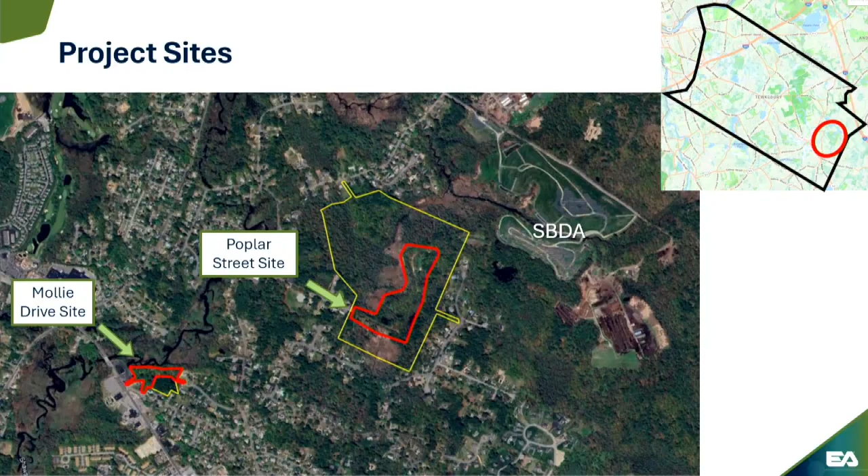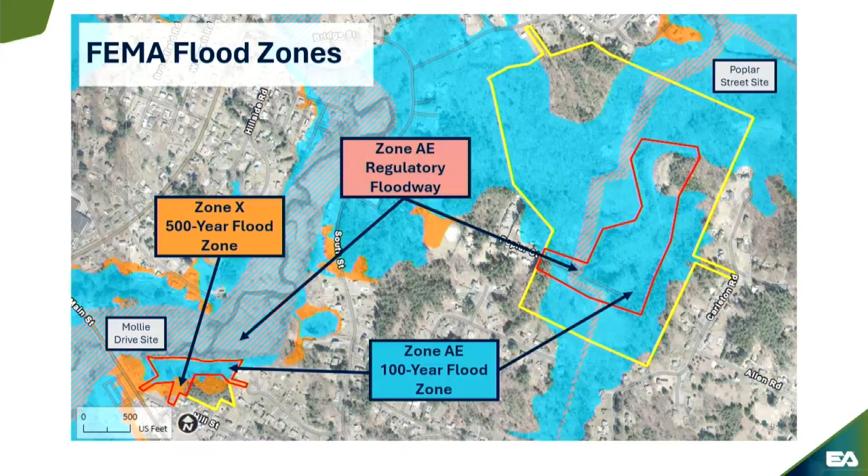This map just shows the location of the two project sites within the town. I just want to point out that the majority of both sites are located within the FEMA 100-year flood zone. So a key goal of the project, which you'll see in the following several slides, is the removal of historical fill from the flood zone to help restore flood storage capacity, as well as restore historical wetlands that have been filled.

Starting with the Mollie Drive site, the overall work area is about 1 acre in size. The site was formerly used as a contractor yard and was acquired by the town.

There was a small soil remediation completed a few years ago, but you can see the areas outlined in orange are the approximate location of soil berms that had been developed prior to the town's ownership of the site, basically soil being pushed around and dumped on site, some of which was placed within wetlands along the Shawsheen River.

The rest was placed within the 100-year floodplain of the river. So the overall goal of the work at this site is to remove those soil berms and restore historic wetlands and floodplains. There's also a good amount of scattered debris across the site, which we are proposing to remove to improve habitat, safety, and aesthetics.

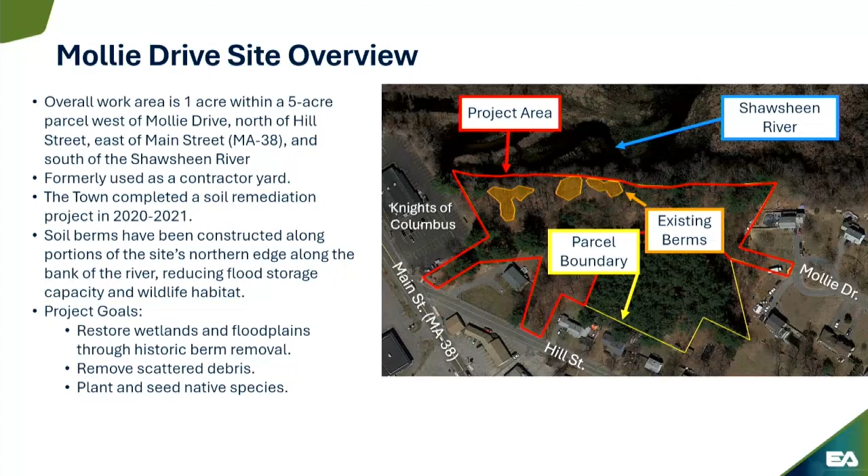The work area at Mollie Drive is relatively small. We have two areas of proposed berm removal, which you'll see a little easier on the next slide, and two areas of proposed grading. One is right along the bank of the river, and the other is just slightly to the left and below that.

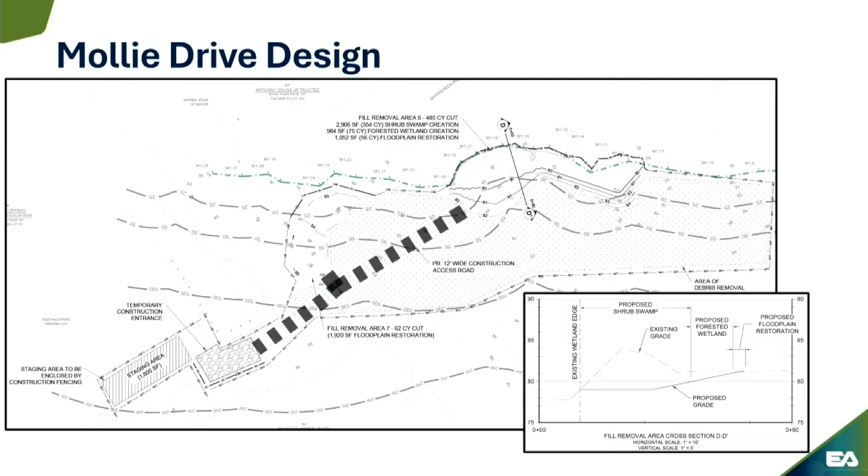The rest of the project is basically the stippled area, which is really just going in and doing selective removal of debris that's visible on the ground surface. So at the Mollie Drive site, we're proposing about 550 cubic yards of fill removal.

The areas and depths of the fill removal are largely based on an evaluation of topography. In a lot of cases, the berms are pretty obvious. There's also been a previous effort to do soil borings at the site, which helped understand the depth of fill that would need to be removed to get back to the native wetland soils.

So about 7,200 square feet, or about 0.2 acres of work to remove fill within this site. That will result in about 2,900 square feet of shrub swamp restoration, just under 1,000 square feet of forested wetland restored, and almost 3,000 square feet of upland forest and floodplain restoration.

There's about 330 square feet of excavation within the BVW just along the edge. That's mainly to get the grades to tie in, so that area will remain wetland. There will just be a few inches of grading along that edge to get the grades to tie in.

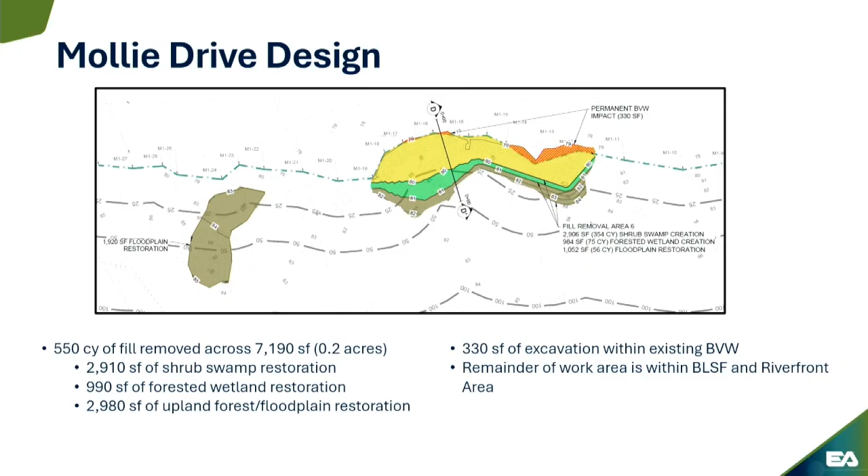Moving to the Poplar Street site, the work area is about 3.1 acres. This is the former site of the Tewksbury South Street well fields. There's been extensive historical alterations to this site.

There are a number of isolated wetlands along the east side of the existing path that have been severed from the larger wetland system that flows through the site due to historic filling. There's also a number of linear berms right along the edges of wetlands that have been placed within historic wetland areas. Similar to the Mollie Drive site, the overall goal here is to remove historic fill, improve flood storage capacity, restore wetland acreage, improve wildlife habitat, and the other functions and benefits that go along with that.

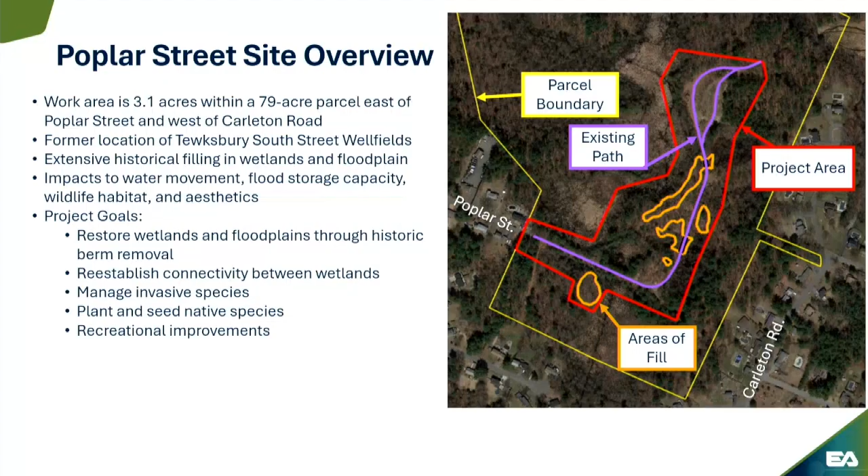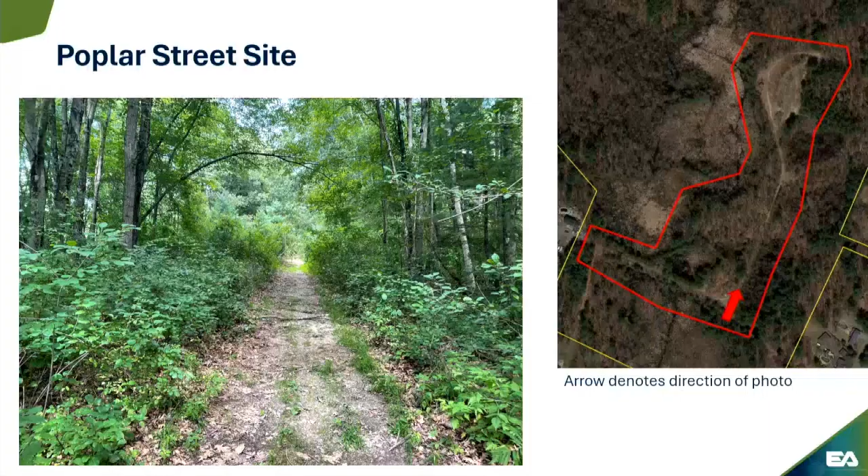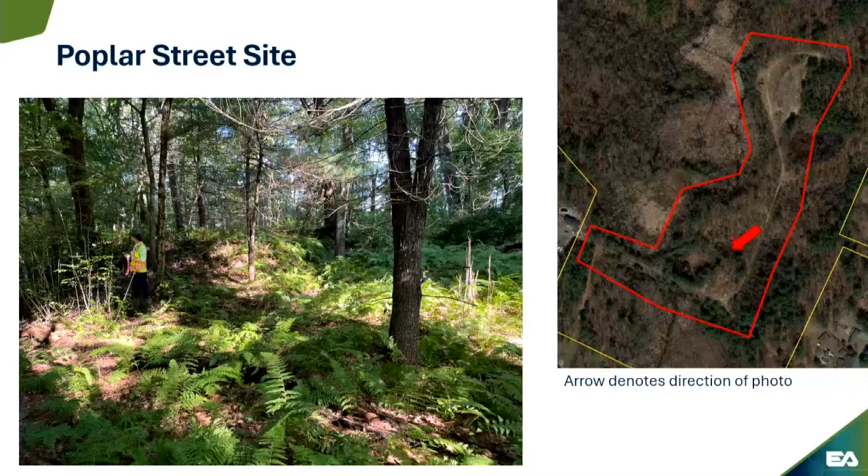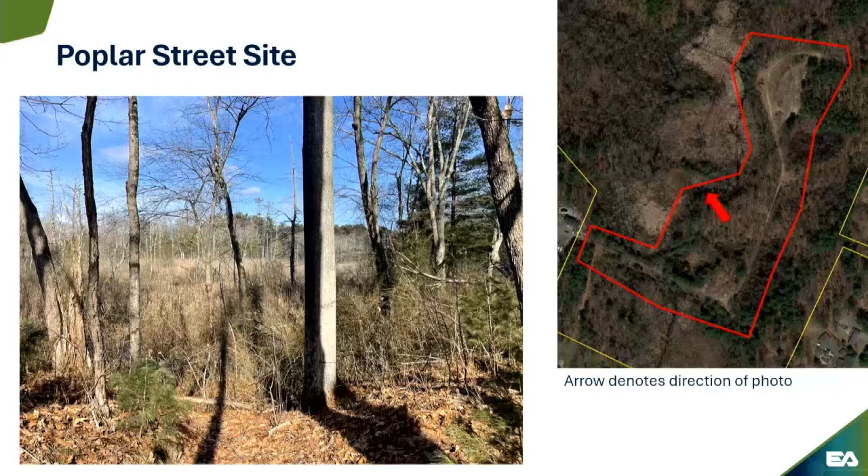So this is the large wetland system to the northwest of where all the work is proposed. That's where the isolated wetlands would have been connected in the past, and we're hoping to help reestablish those connections through the fill removal.

There's also some limited recreational improvements, primarily in the northern end of the site. There's currently a very steep eroding slope in the northern part of the site that we're proposing to install a series of steps to make that access a little more stabilized. We're also proposing a few benches up in that area.

But the main portion of the work is primarily the fill removal, and you're seeing the northern edge of that on the sheet. In that cross-section view, you can really clearly see the soil berm. On the left-hand side is the existing wetland elevation, right around 80.

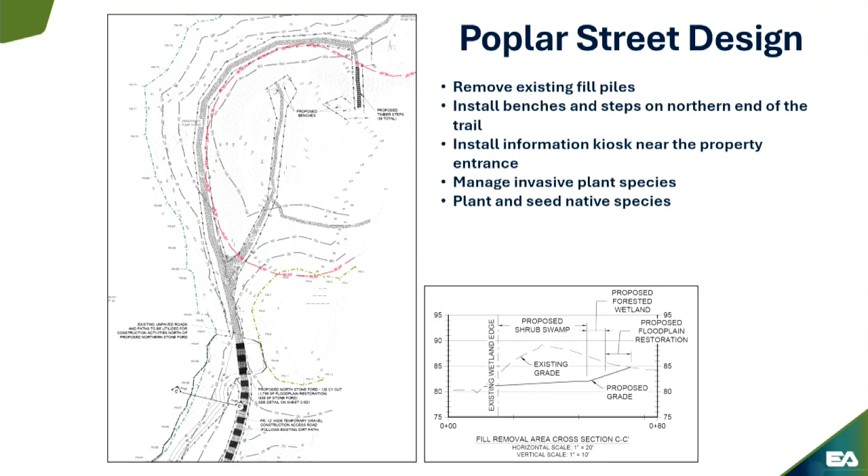On the right-hand side is the native ground surface, and then it goes all the way up to like 88, 89 feet at the top of that berm. So we'd be removing that and improving hydrologic connectivity and restoring wetlands that have been filled.

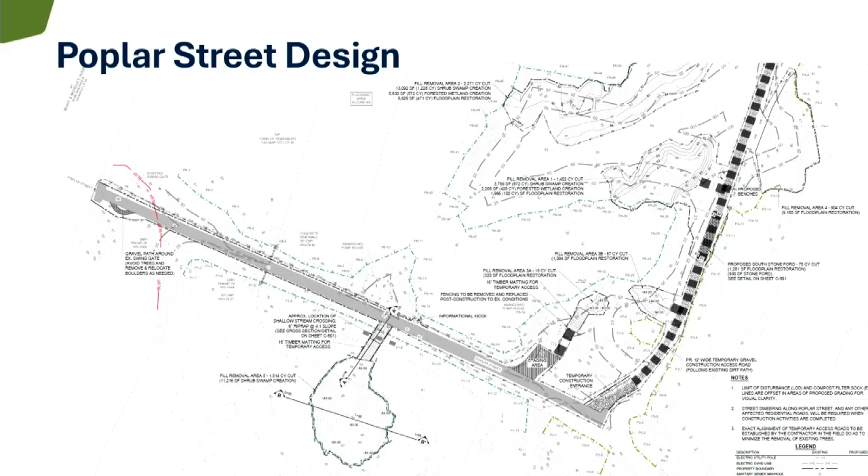So this is the southern part of the site. You can see more of the proposed grading here. The access is primarily along the existing roadway. There's going to be some short access spurs that go off through the forested areas to get to some of these berms, but we're trying to target those to avoid any unnecessary tree removal.

And this is the whole grading approach for the entirety of the Poplar Street site. You're seeing all the different areas of berms proposed to be removed, a total of about 6,176 cubic yards of fill removed across 1.3 acres, which would restore about 0.6 acres of shrub wetland, about 0.2 acres of forested wetland, and 0.5 acres of floodplain restoration.

We do have some excavation within the BVW right along those edges, but those areas will continue to be wetlands. There'll just be a small amount of excavation right along that proposed edge.

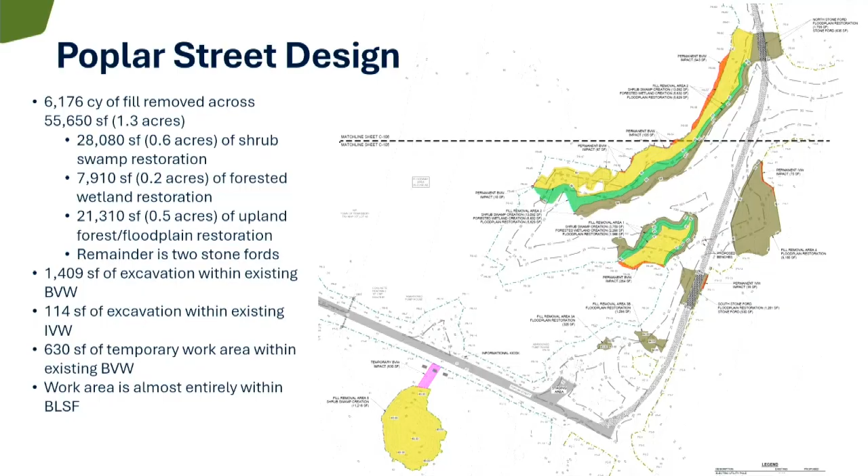We also have a temporary crossing of the wetland to access that fill removal area at the very southern end. That's basically like an island in the middle of the swamp. So there'll be some temporary timber matting going across there, which would be removed at the end of the project.

We're also proposing two stone fords at this site. I mentioned there's a series of isolated wetlands, and we're trying to reconnect those with the larger wetland system. The town also wanted to maintain the ability to get light vehicles through the site for maintenance and cases of emergencies or things like that. So we looked at a few different options for how that could be achieved and decided that stone fords would be the best way to go.

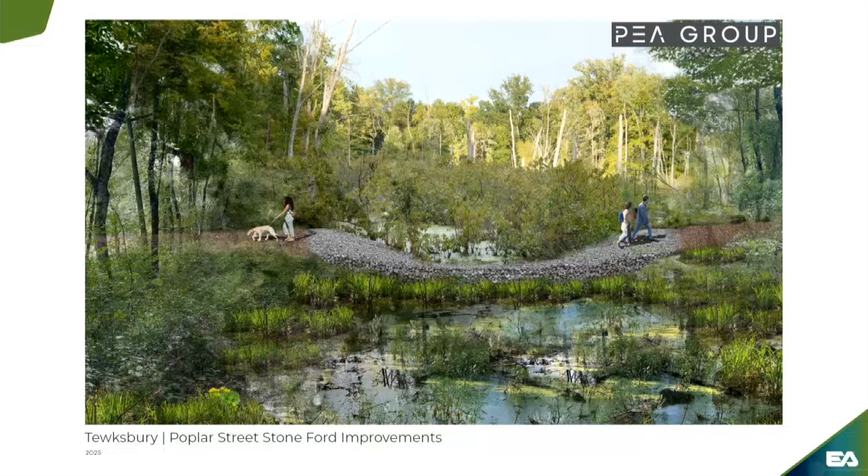It basically maintains the ability for people to use this as a pedestrian trail. You can drive over them, but they're semi-pervious. Water can flow through them, and they'll be lowered, as you can see in this rendering, so that in the event of a storm, and water is filling up the isolated pocket wetlands, it can still flow over the stone ford and restore that hydrologic connectivity.

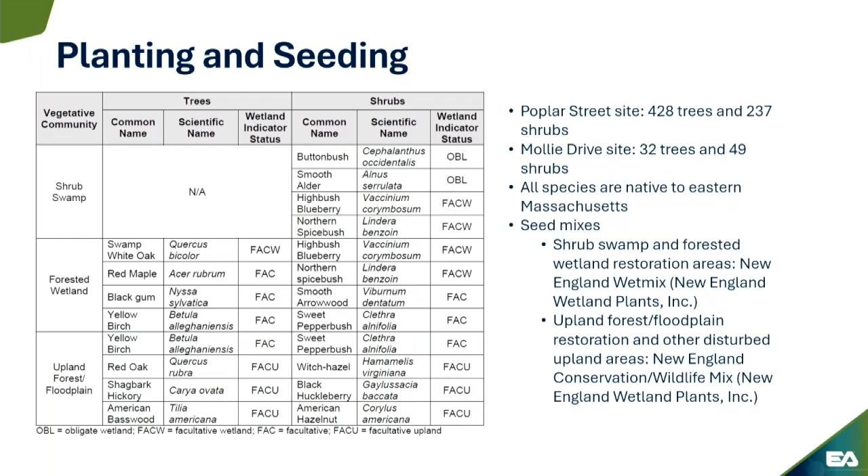So all the fill removal areas will be planted and seeded. The goal is to restore those areas to maintain a planting density of about 500 trees and shrubs per acre on average. At the Poplar Street site, we're proposing 428 new saplings and 237 new shrubs, and at Mollie Drive, 32 saplings and 49 shrubs. All those species are native to eastern Massachusetts, and all areas of soil disturbance would get a seed mix, either wetland or upland species, depending on the area.

So just the overall project sequence - we talked about the earlier phases of the work. We're hoping to get into final design this spring and go out to bid this summer. The tree removal would not be able to occur until, I believe, mid-October to November to avoid impacts to federally listed bat species. So we're hoping for a construction start, ideally in late fall to early winter of this year. I'd be happy to take any questions.

All right, my first question is going to be how close to the river - it seems very, very close. Like that rendering, it's not hidden by any trees, or it won't be hidden by any trees. It will be very apparent. At the Mollie Drive side of things. Yeah.

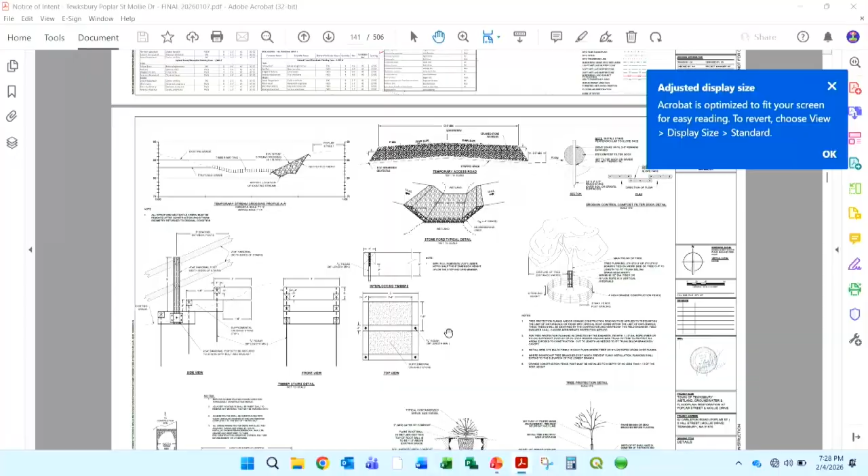Yeah, so basically, to construct it, they would cut out part of the roadway fill. We have a detail in our drawings, which I can pull up, but basically it's a couple different types of stone put down so that it becomes more pervious. There's a geomembrane liner and then gravel on top of that. So it will need periodic maintenance to top dress it. It's going to erode from people walking on it, or if there's a big storm, the stone's going to move around a little or get compressed. So it'll need periodic maintenance, but nothing more than probably every few years, I would think.

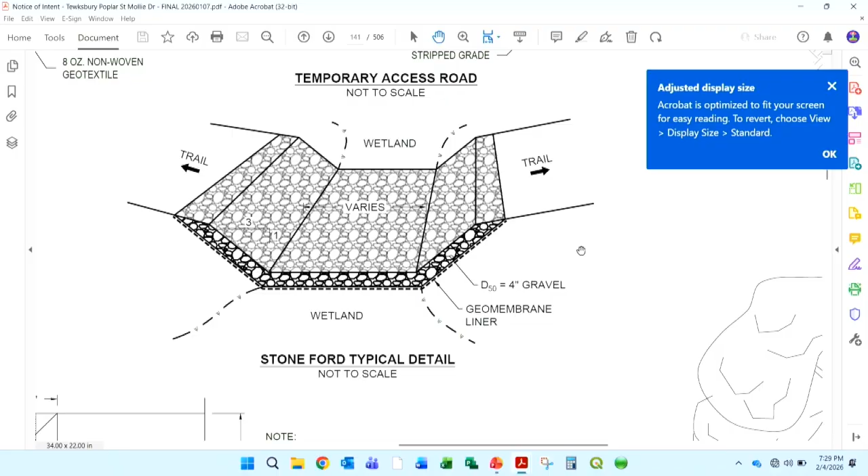I guess I'm also wondering, the benefit over this from a culvert is just less maintenance, I would assume? Yeah, so we did consider a culvert. The issue is the road berm here is not very tall, so to put a culvert in, there wouldn't be a lot of height above the top of the culvert to the road. So you'd almost have to make the road higher so that you could build it up to fit a culvert there.

Culverts tend to have some other issues too. They can get clogged. They're not as great for wildlife movement because, if you're a frog, now you have to go through this dark tunnel instead of just jumping over some rocks in the open air. So yeah, there are more issues with that. We also talked about basically a small bridge, but that's a lot more expensive and also has other maintenance issues. So the stone ford was kind of the happy medium between those three options.

And then where does all this fill end up? Where are we shipping it off to? Yeah, so right now the plan is basically to use it as daily cover for a local landfill. It'll ultimately be up to the contractor, and they'll have to identify a location that is compliant with state regulations for soil disposal. The plan is that it would just be used as daily cover for the landfill, but if there's another location in town that needs fill, then it could potentially go there for reduced construction budget.